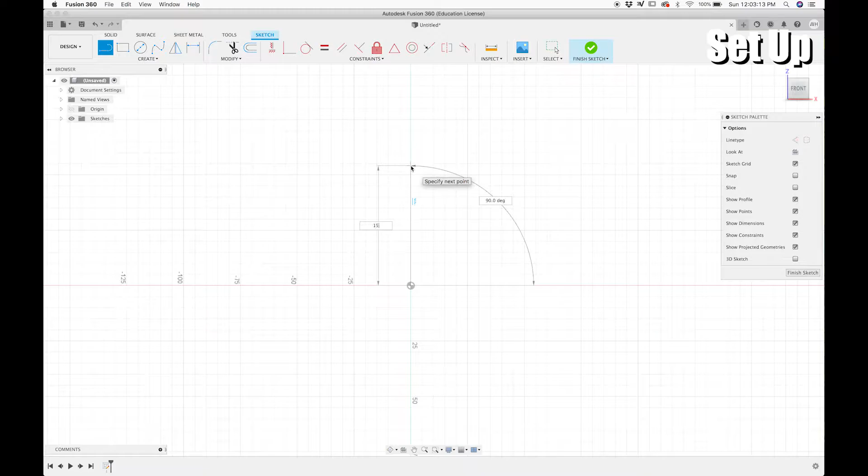Now, select the line tool and start your line at the origin point. And move your cursor straight up. It should lock into a 90-degree angle and then type in your wanted value or your figure's height. In my case, I am doing 150 millimeters.

It is important you start the line at the origin point because it gives you a nice reference point for the ground, and when we create the feet, it should be easier to make sure they're nice and flat for the figure to stand on. It's also best practice for modeling in general.

If you start your figure with the origin point somewhere else, you can have some weird rotations when you export your model to different software for detailing. Now to complete your sketch, all you need to do is hit Finish Sketch.

The next thing we will do is insert your reference material as a canvas or an image plane. I have included the files that I used as my reference in the description. You don't have to have your images set up the way I do, but I find it's easiest to break up the body by color and then save the references as different layered images, so you can turn on and off the body as you need.

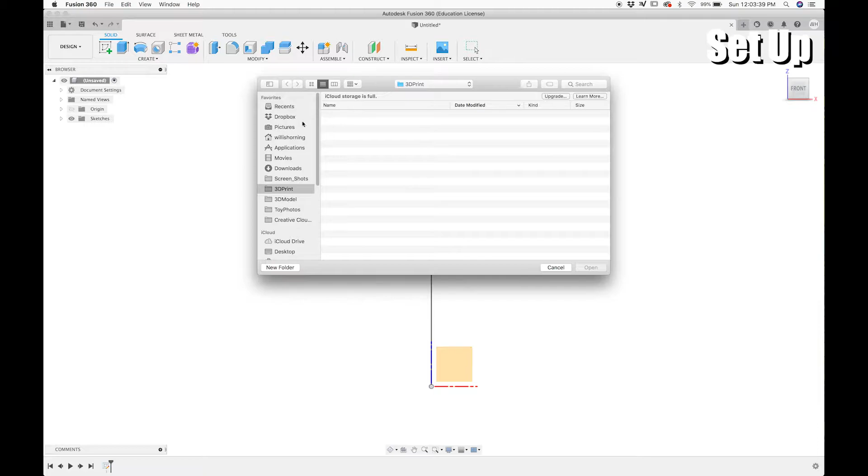To create a canvas, go to Insert and then Canvas. You will need to navigate to where you saved your reference photos to, then choose the front image. Then choose the same plane as we made our sketch on. Use the tool to scale and move your image to line up roughly with your first sketch.

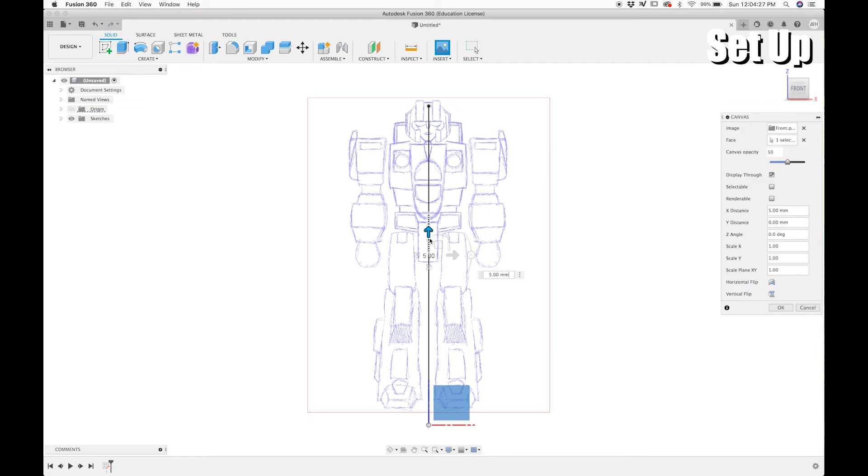Do the same for the other three images, but rotate your camera by turning the view cube 90 degrees and picking the right plane. Line up the three side view images. They do not need to line up perfectly, they just need to be a rough outline.

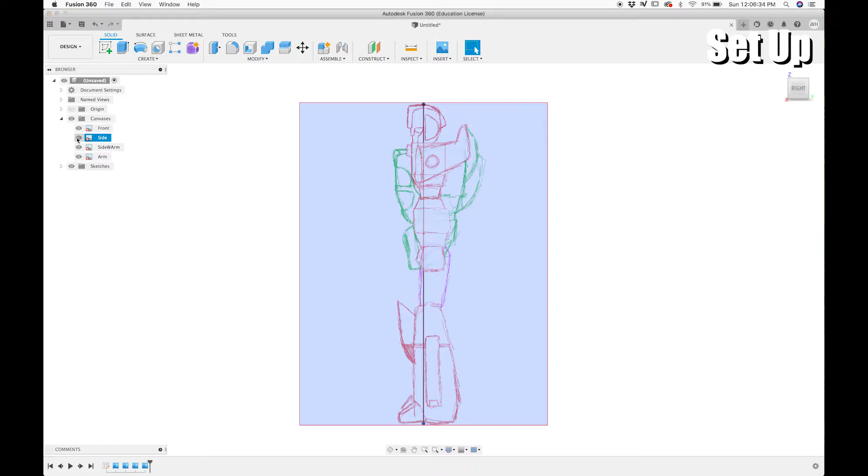Name each image accordingly and make sure you can turn the images on and off by selecting the eye next to their names.

Now for the base sketch. You're going to make a new sketch on the front plane. Make sure your initial sketch for the height is still turned on. Select the line and find Project under the Create tab. This will project the line onto your new sketch.

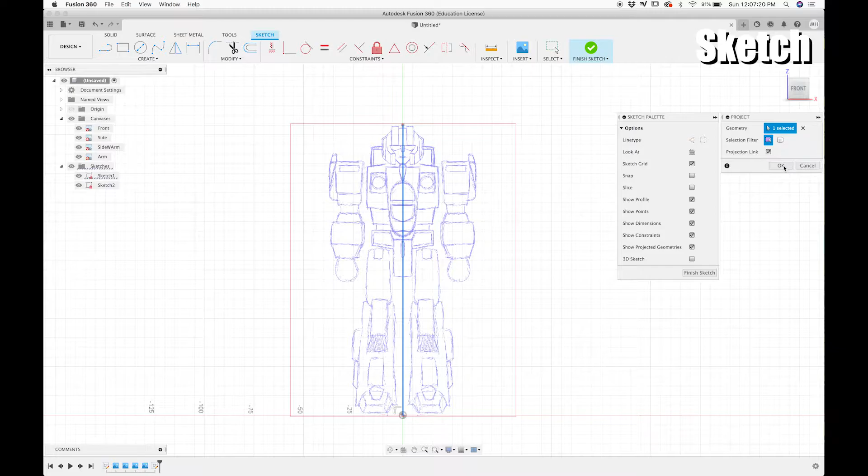You should now be able to use the center line as a tool to help you trace one half of the body. We only want to trace one half because we're going to use the mirror tool later to make sure the figure is completely symmetrical.

Now using the line and the rectangle tool, block out some basic shapes from your reference. Make sure everything is a closed shape. You will know it's a closed shape if it turns blue.

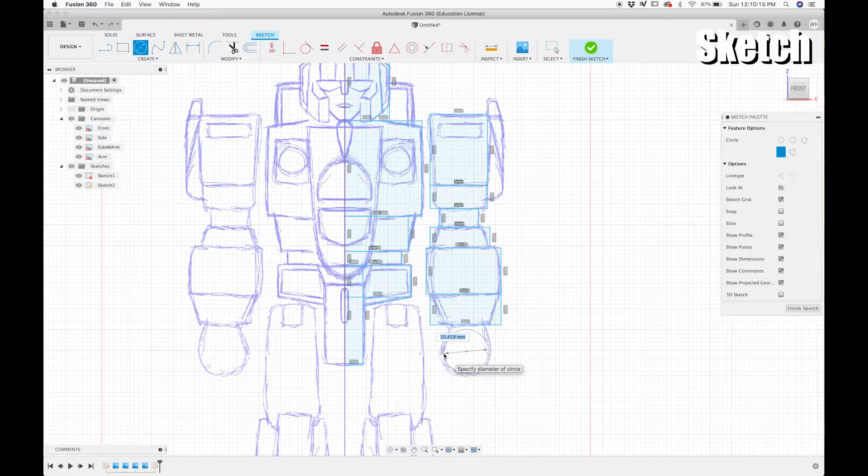If you want to make a curved shape, use the circle and the spline tool. The spline tool will give you some tools to bend and shape the line how you want. You will need to hit the check mark when the line is complete to move on to the next shape.

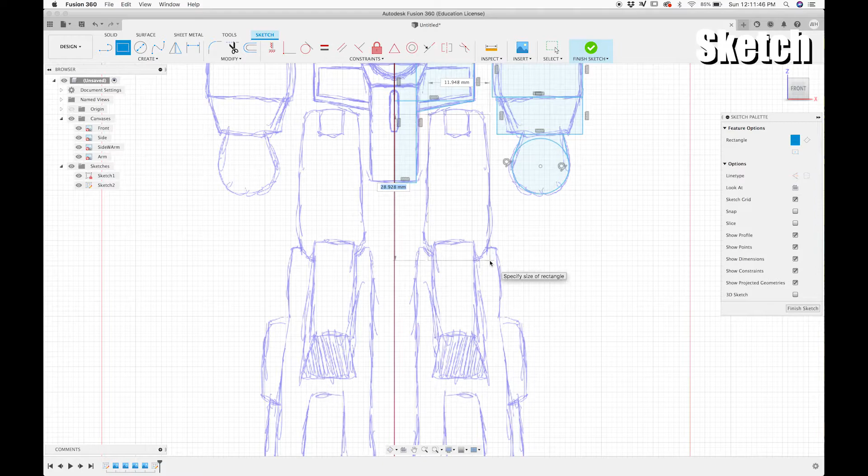Now that we are done with the sketch, hit finish sketch and then select part of the body. Now use the extrude tool to give that part depth. You will want to try to line up the extrusion with your reference. Use the different direction options to help.

Two sides and symmetrical will be handy for this. The important thing at this step is to make sure every extrusion is a new body. You do not want to join or cut any bodies right now.

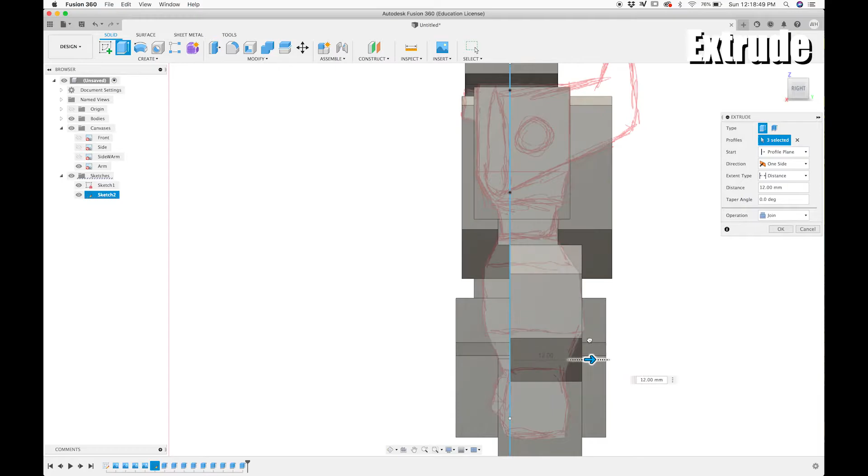So now we are going to make another sketch for the side view.

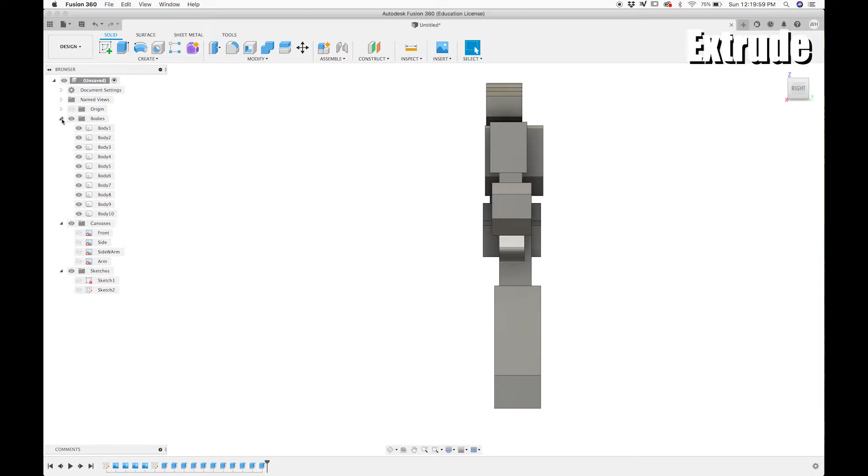I start my sketch on the flat side of the body, so I have some of the body already projected. You realistically can select the side plane and project the whole torso instead of just the waist. It accomplishes the same thing. But do as we did before, trace out the basic shapes of the body.

I go and make some more sketches on the front to help me block out the cockpit on the chest. For complicated shapes, it might take a few tries to figure out how you want to block out the shape, but keep experimenting on different methods. This is the best way to learn.

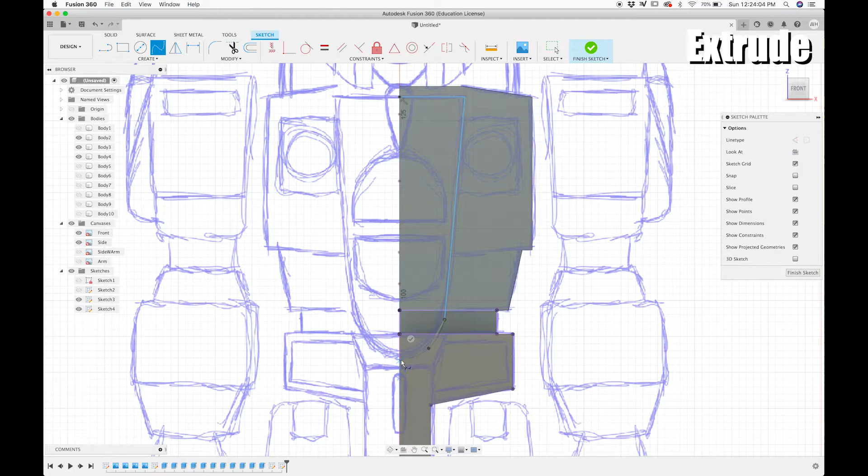Now I'm extruding shapes for the cockpit and using the profile sketch I made to narrow in a better shape.

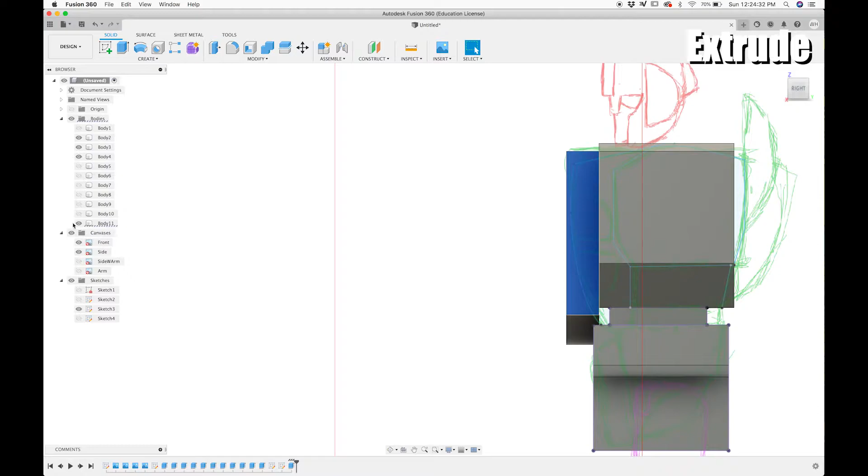Here a bit of the original extrusion is left over, and I don't like the shape that it makes, so I selected it and hit delete or backspace on the keyboard to get rid of it. I wanted the cockpit to be a bit rounded and not as sharp, so I selected the edge I want, and then used the fillet tool to round over that edge.

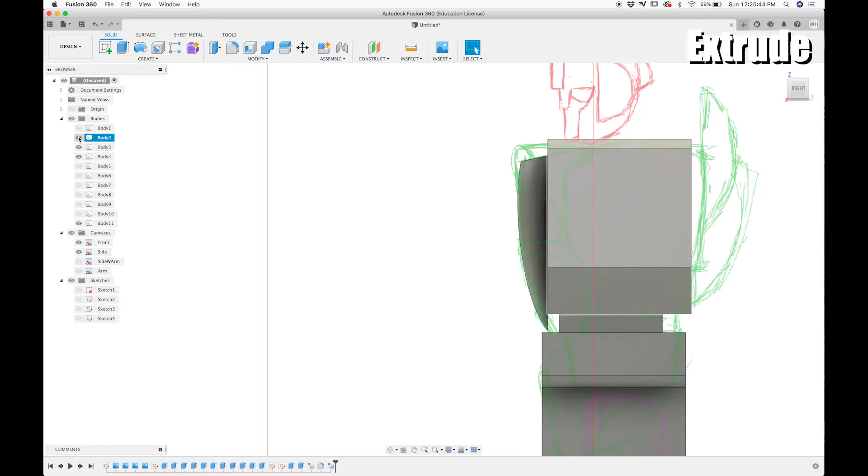You don't want to round out everything for blocking, but doing it to better understand and narrow down your base shapes is fine. I make some more extrusions and some more cuts to refine the shape here. This is a point where you can really mess around with different extrusions and cuts.

If you already have two bodies and you want to use them to cut or intersect each other, you can instead use the Combine tool underneath the Modify tab. It works the same as the extrusions.

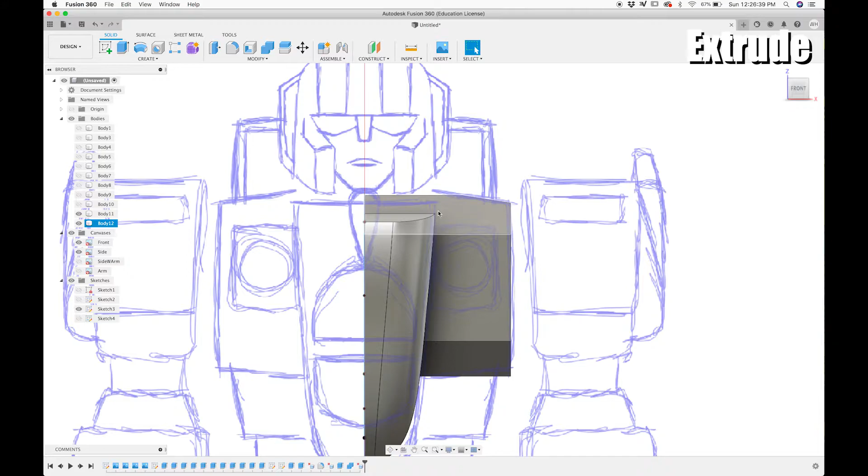Here I wanted to move a section of the torso up further, so I copied and pasted the body and cut a part out of one of the copies. I then selected the faces I wanted to move forward, and then using the Move tool, I moved them where I wanted them to be, and then combined the shapes back together with the Combine tool.

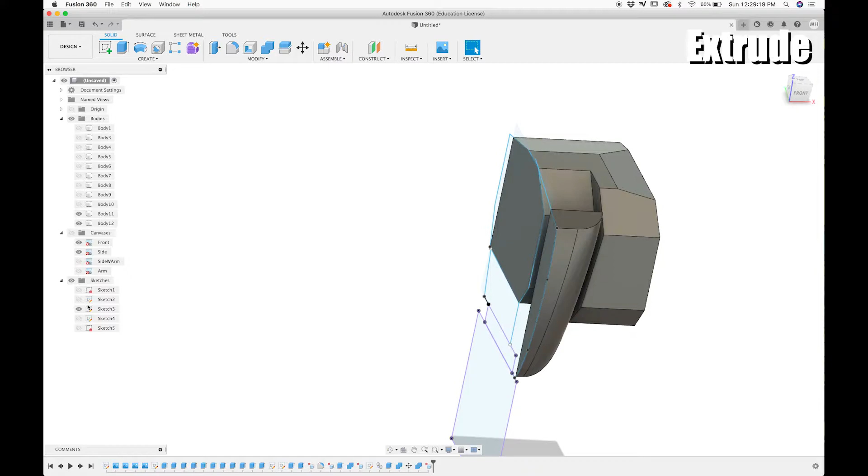At this point you can combine some of the body together, but think about how the figure will move before you do. In this case, I'm not going to have any upper torso rotation, so it doesn't matter if the upper torso is combined together. But I don't want to combine the hips and torso together because I want to have a waist swivel and maybe an ab crunch.

Here I want to block out the thrusters on the chest. I know I want them to be the same thickness all the way around, so I make a 2mm line coming out from the edges.

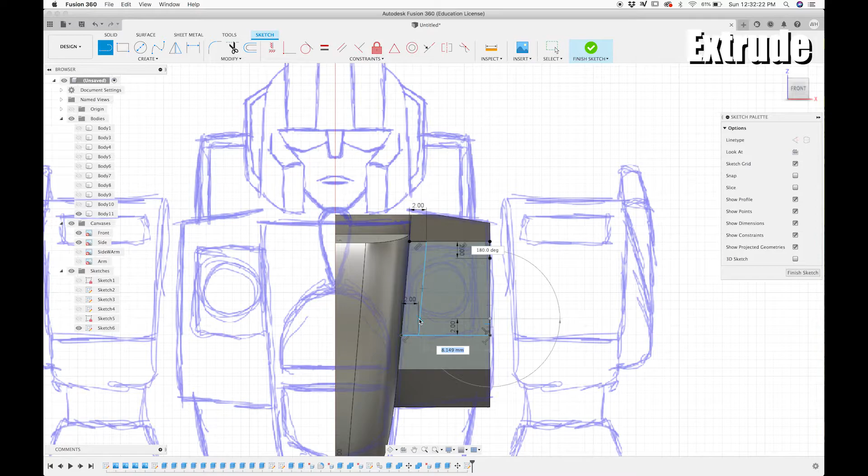I decided that this is too thick, so I selected the faces after I made the extrusion, and I used the press pull tool to move all the faces the same distance.

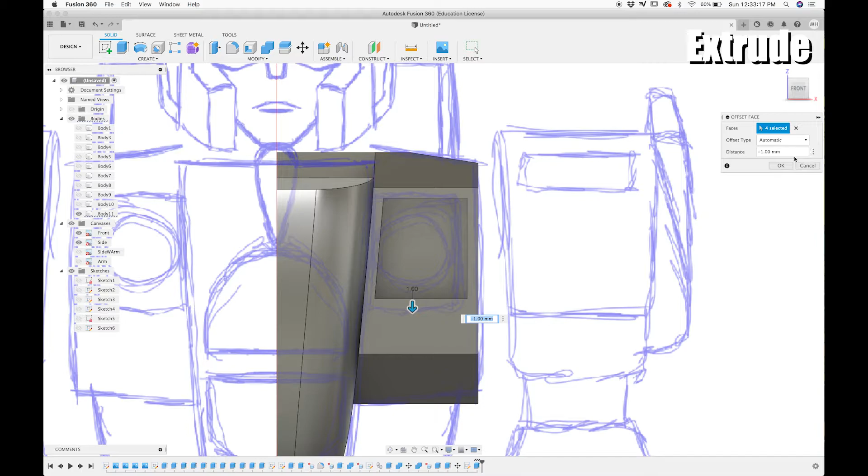To make the turbine roughly centered in the hole I made, I make a line from each corner and then make a circle coming out from the middle of the line. I know I want the turbine sticking out the same distance as the rest of the chest, so when I make the extrusion I select the pull arrow, and then I click the front of the chest. This lines up the two, extruding them to the same point.

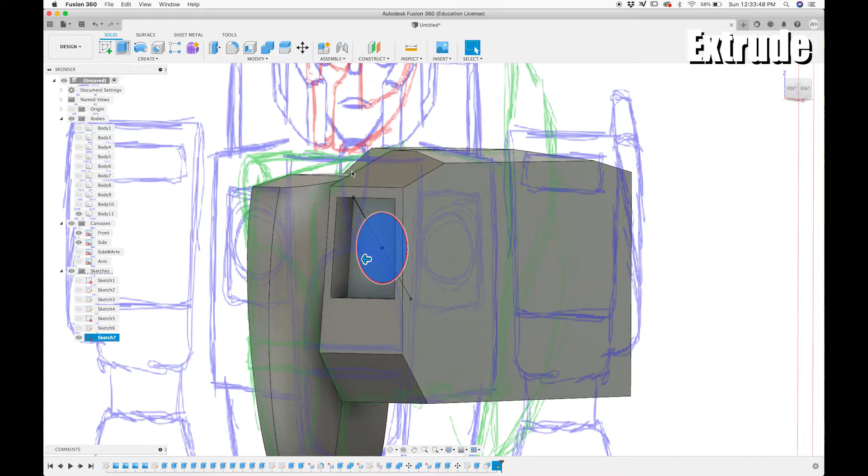For the rest of the body, it's more of the same. You can follow along, but I'd recommend trying out the tools in the Modify tab and the Create tab to see if you can figure out how to use the chamfer tool to make some harder edges. Also see if you can move some faces around with the Move tool. Keep in mind the Move tool has different options for moving faces versus moving whole bodies. You can also move around the pivot point to move an object from a different point or axis.

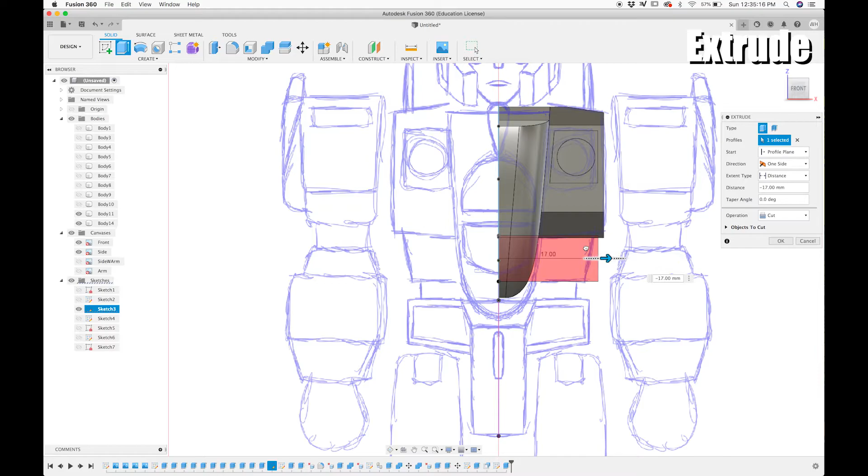For the hips, arms, and legs, I'm using the same techniques as I did for the torso, so I'm going to play the footage a little faster. Blocking can be a free-form exercise. Experiment with the tools to see what you can make. I wouldn't try to go for any more detail than I did here though, because it might make life more difficult for yourself in the following videos.

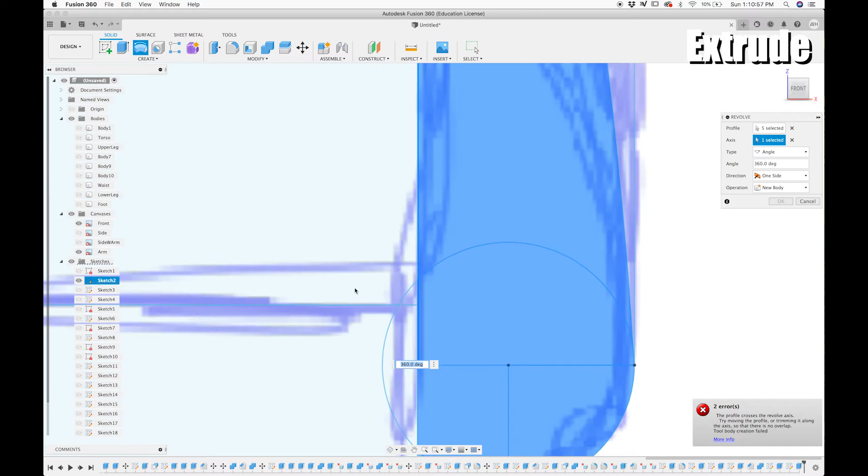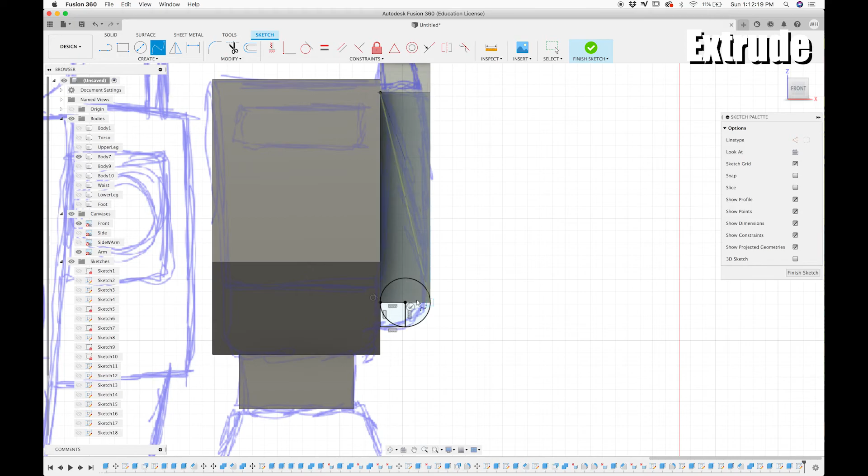For the shoulder wings, I use the revolve tool. I took a few different passes without getting a shape I like, but honestly I don't like the shape I ended up with. This is 100% okay, you can always change things along the way. Your design will change pretty drastically once you start trying to make things move. So if you don't like the solution you came up with today, don't stress about it — it's part of the design process.

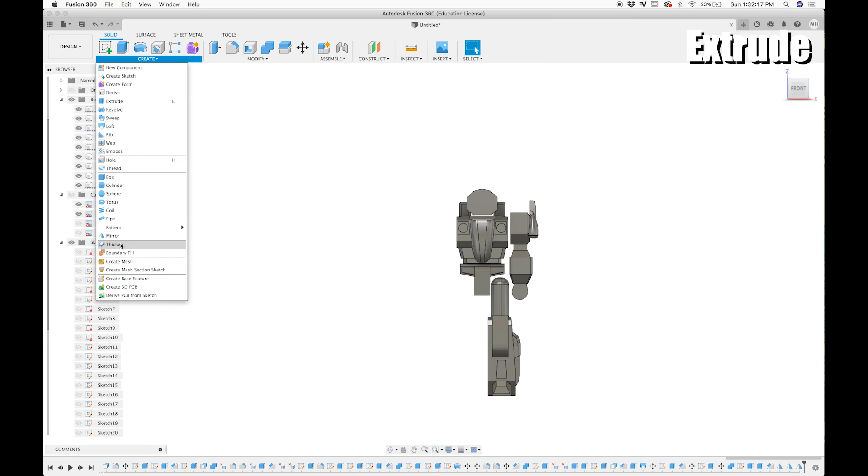Before we end, I want to point out that I very specifically did not do any detail for the head. Fusion 360 is not a great program for face sculpting. When we get to that point, I will show you the basics of making a face sculpt in Blender and then cutting up the sculpt to use in Fusion 360.

This video might have been short and a bit basic, but next time you'll be using your blocked out sculpt to create an articulated arm. We will be going over 3 types of arms: ball jointed, single elbow, and double elbow.